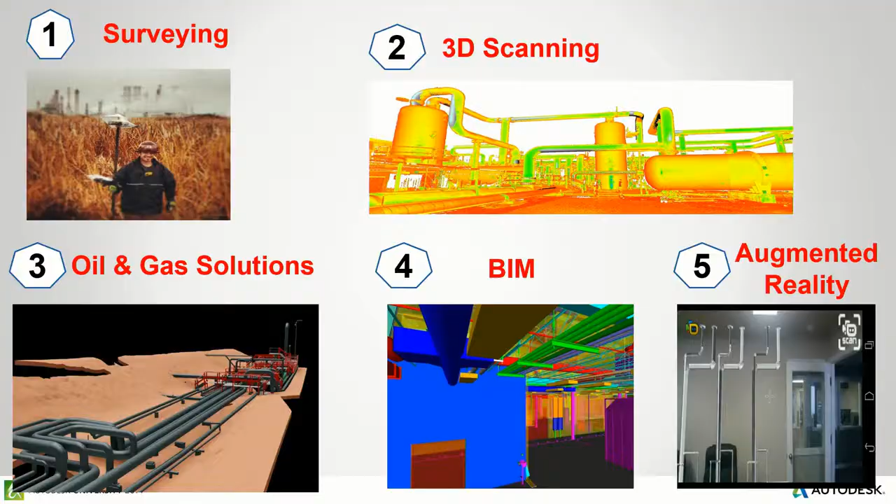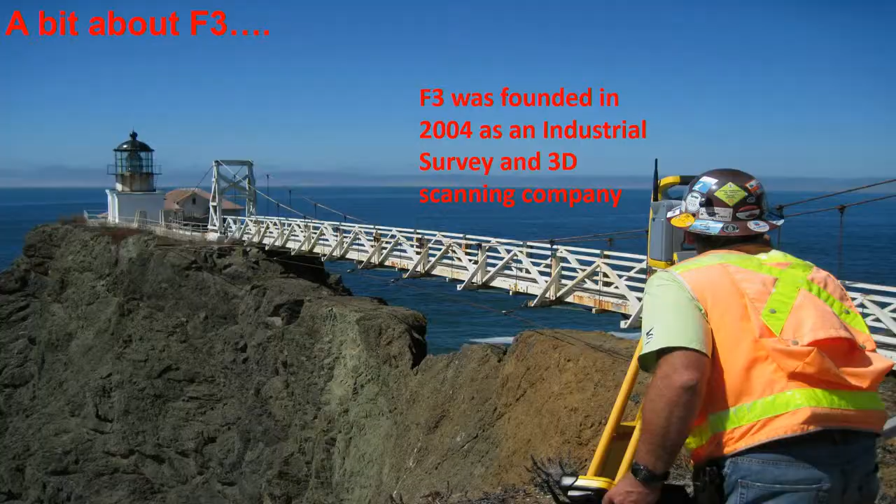So first, a little bit about F3. We were founded in 2004 as an industrial surveying and 3D scanning company. Today, we're a global provider of land surveying, 3D scanning, 3D printing, metrology, BIM and CAD services, and we're fortunate enough to work with a lot of great companies.

I got my mom calling. I think I'll have her wait. You guys want me to answer it? No. What, Mom?

So, 3D scanning in oil and gas. The origins, roughly, I'm going to go over that. The struggles, at least ours, with acceptance and accuracy, adaptation, successes, and then kind of the same thing with BIM. It's crazy how they parallel each other a little bit, at least from our perspective. Then we'll have some time for questions.

So it's my theory that the BIM industry, at least in Northern California, is on the same pace as the petrochemical industry was about 15 or 20 years ago. And what I mean by that is the petrochemical industry was slow to catch on. Started off using 3D scanning, reality capture, and offshore oil rigs. It's kind of where the techniques were perfected. And then went to refineries, tankers, terminals, and pipelines.

The BIM industry was slow to accept point cloud technology as well. I think a lot of it was that architects didn't know it existed years ago, and then when they did know it existed, the price point was still high because most of the service providers that were really good at 3D scanning were working in the petrochemical industry, and you have high labor rates and safety and all these things, so the price years ago for point cloud data collection was extremely high.

Contractors started catching on to it, started using it. In our experience, maybe 4 or 5 years ago, it started becoming something we'd see on bid documents, laser scanning. When Revit 2012 came out, it kind of changed things a bit, because then point cloud technology was able to go right into the Revit platform, somewhere between 2012 and 2013. And that started changing things.

And then we started seeing more architects requesting point cloud collection for tenant improvement projects. And then we started seeing AutoCAD deliverables. I'll talk more about that. I'll talk a lot about that, actually.

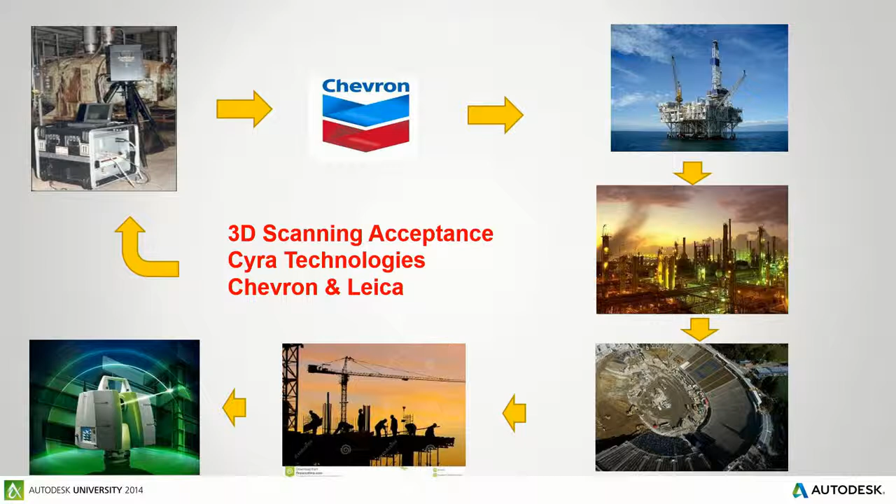So that technology then grew into refineries and then construction sites. Leica ended up acquiring the patent for the Cyrax scanner, and if you see these P20s and C10s, that's basically the latest generation of that same technology that Jerry developed in Berkeley. Anyway, that's a little brief history as far as I know on how scanning came to be.

As a service provider, we really struggled with even getting local refineries and industrial places to accept this technology, because we were trying to hand them a point cloud. This was years ago for us. It wasn't until we decided that when you actually do something with the data, this business will actually grow. We were forcing point clouds into our clients' hands, and they couldn't accept it because they didn't have the software, they didn't have the computer space.

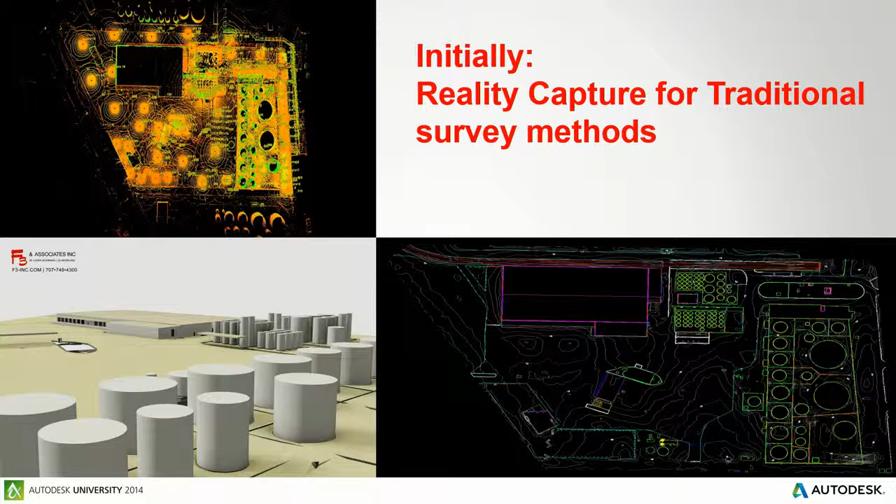It was frustrating. So we started going back to our roots as land surveyors and producing maps from the point cloud data. At the time, we would do a map like you see here, and we would just put this in a little block on the title page just to say, 'By the way, it's a 3D CAD model too.' But even then, people weren't using a lot of 3D CAD. This actually started selling the service by doing something with the point cloud data, instead of trying to force point cloud data into our clients' hands.

So, early successes. We had to kind of build on proof of concept. It was a big education process, both in the petrochemical industry and in the BIM and construction industry. It's the same thing that we're going through now that we went through years ago.

One of the examples that we used to take on the road with us is this one. This is a dry duct tower replacement, replaced in kind. The challenge is the unit doesn't want to be shut down. Scaffolding is expensive and dangerous. There were no record drawings, and the manufacturer needs direction.

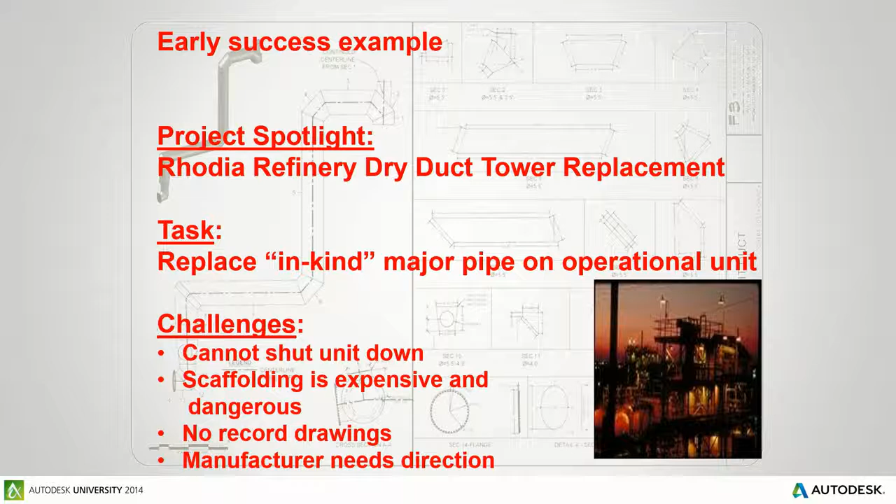So that's basically the job right there. We had to replace this pipe. And the client still had no clue how we were going to achieve this as-built. And they didn't care because at the end of the day, we just extracted what we needed and we gave them this set of drawings. Again, the point cloud never really went to the client, it stayed in our office. But we were making these drawings, and essentially that's the end product. The client never saw the cloud.

This is the same in BIM when it first started as well, and I'll talk about that. For us, the perfect service is that when this pipe's manufactured, we'd like to go to the manufacturer's facility and also scan the one they built. And if we can do that, then we kind of close the loop on where the error can be, and the thing usually slips right into place. This particular pipe was built in Italy, and the client would not fly me to Italy to scan that pipe, no matter how much I asked and begged and pleaded.

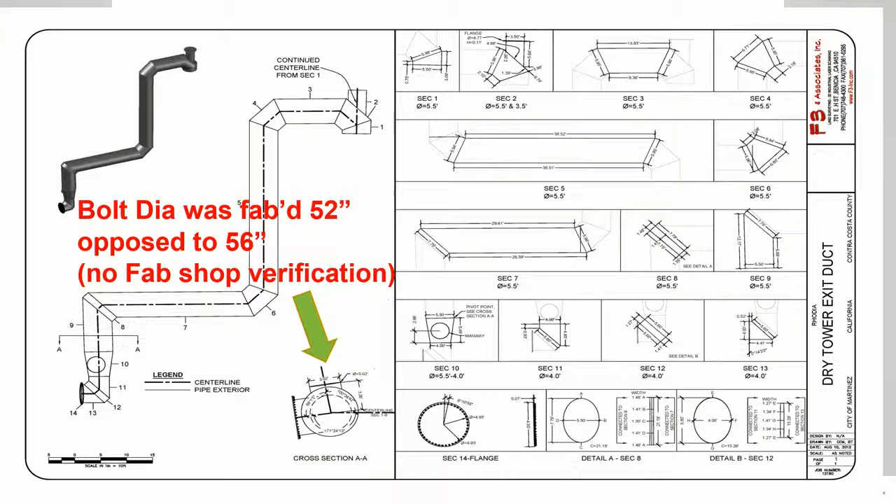But when it got on site, we discovered that it was actually built to a 52-inch as opposed to a 56-inch diameter. We were able to make that change in the laydown yard before they flew the pipe up. So, as jobs like that got behind us, we started discovering that clients were getting more and more confident with the process, and they were trusting in the data, and they were trusting in the accuracy. So as this confidence increased with our petrochemical clients, we started seeing the submittals start changing.

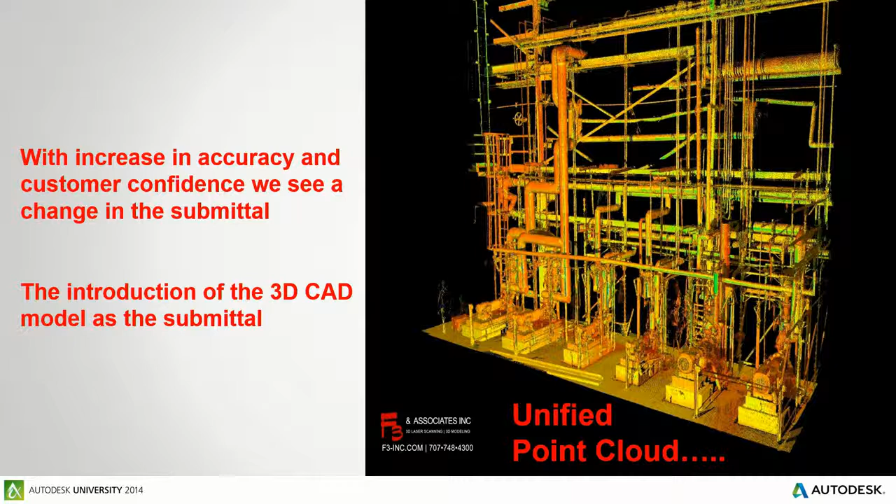And now what we're starting to see at this time, this is a couple years ago, is the introduction of a 3D CAD model as the submittal. So where we were just giving them plans in the past, now we're starting to give them 3D CAD models. So something like this turns into something like this, and that's the end result. Maintain the accuracy of the point cloud, which is about 1/8 of an inch. And this is a working, living, breathing model. We use the combination of AutoCAD Civil 3D and AutoCAD Plant when we do these models. Valves actually turn. It can be the basis for asset management, depending on how savvy the client is.

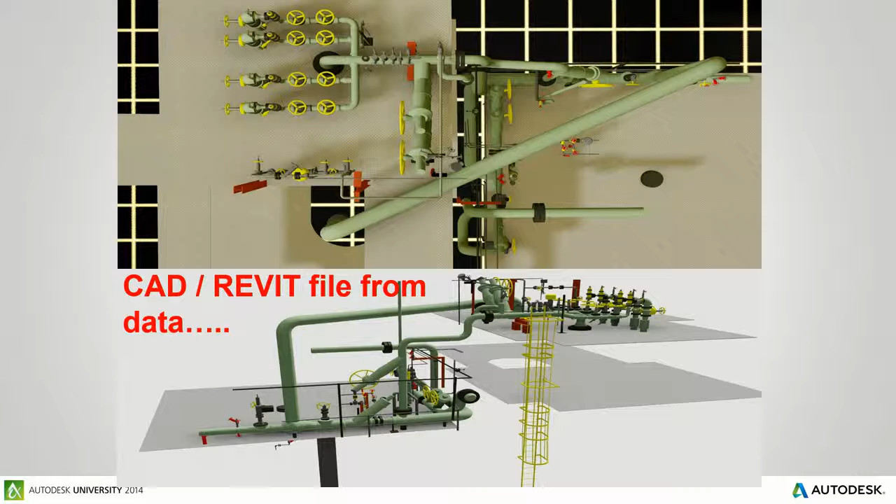Another example is this pipeway here. I like to use this slide too because it illustrates, I don't know how familiar everyone is with scanning, but scans come together from multiple setups, and that's how you create one true 3D scan world. If I was to turn a scanner on in the middle of this room, I'd capture the side of your heads and the front of the chairs, but I wouldn't capture the back. So we move the scanners around and we stitch them together with targeting. If you practice surveying like my company does, then you can stitch them together with coordinate geometry as well.

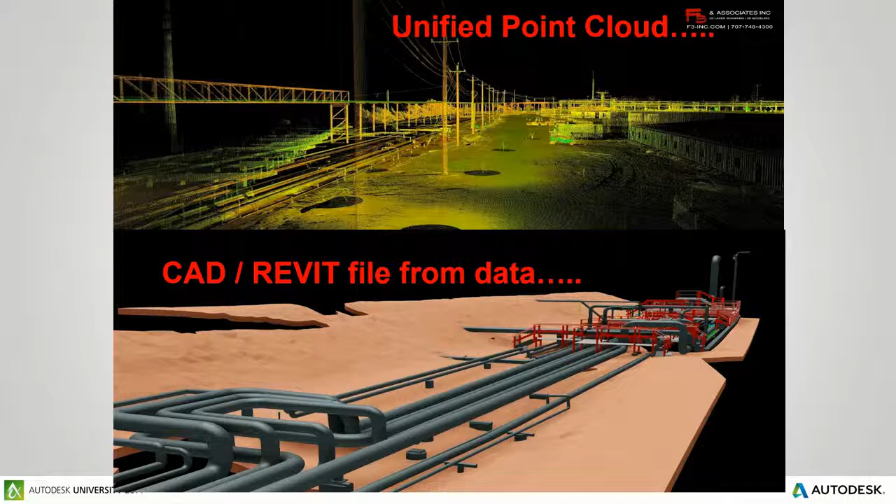And typically, if you are very careful with this technology, your bundle adjustment, no matter how many scans you throw in the mix, can be 1/8 of an inch or better. And so multiple setups are used to achieve one final cloud, which achieves one final pipeway. Another example of that. We don't submit a lot of Revit data in the petrochemical industry. Most of it's 3D CAD. Some more examples.

So, probably the biggest reality capture milestone for us, and this is the one I like to talk about quite a bit, is this project. This is a major turnaround of a coker unit. All internal components need to be replaced. The owner wanted to remove the top of the coker. The coker is 400 feet tall. And the owner, being the refinery, wanted to cut the thing in half, set it on the ground, and then that's how they're going to remove the internals.

Well, the contractor thought it would be good if they could just cut 2 door sheets in this thing instead. Cut one on the bottom and one at the top, and they could remove the internals, and it would speed up the process. It would be safer. It would be more cost effective. But the owner didn't believe it was even plausible to do the project this way.

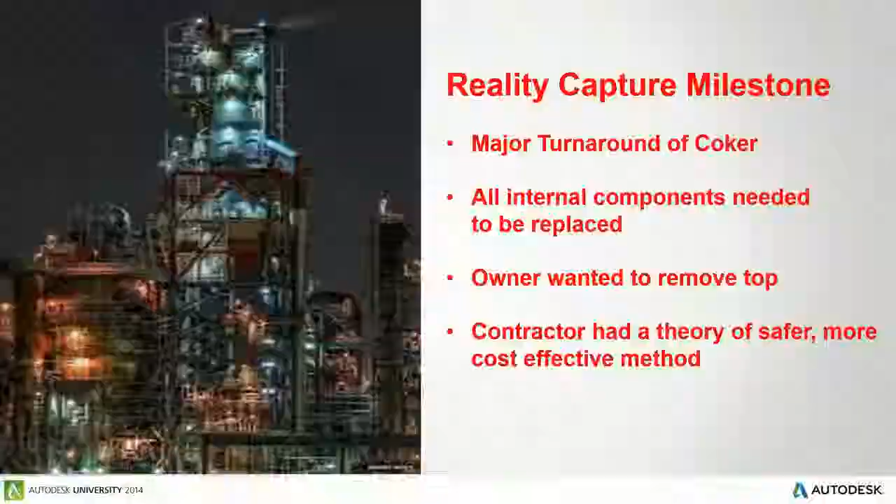So we scanned it, as you see up top, and we produced this 3D CAD model of the outside and the inside. We got to the inside through a couple of manways, and then we filled in the gaps with what we couldn't see with the archive plans in a 3D CAD environment.

And the result was, it's going to be a long day with this clicker.

There it is. So the result was this coker here, again, 400 feet tall. All the internals are on the inside where they're supposed to be. All the different colors signify where the contractor wanted to slice this thing up to remove it out of the door sheet. And the reason we produced this was to make this removal video right here.

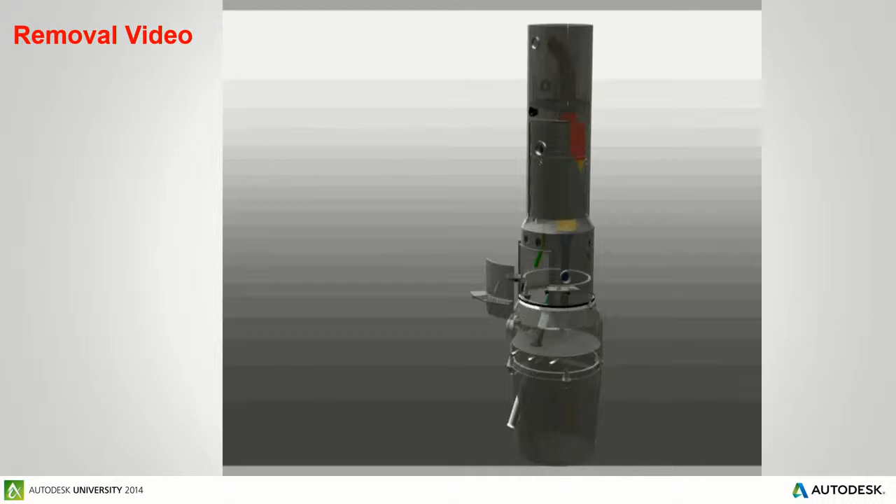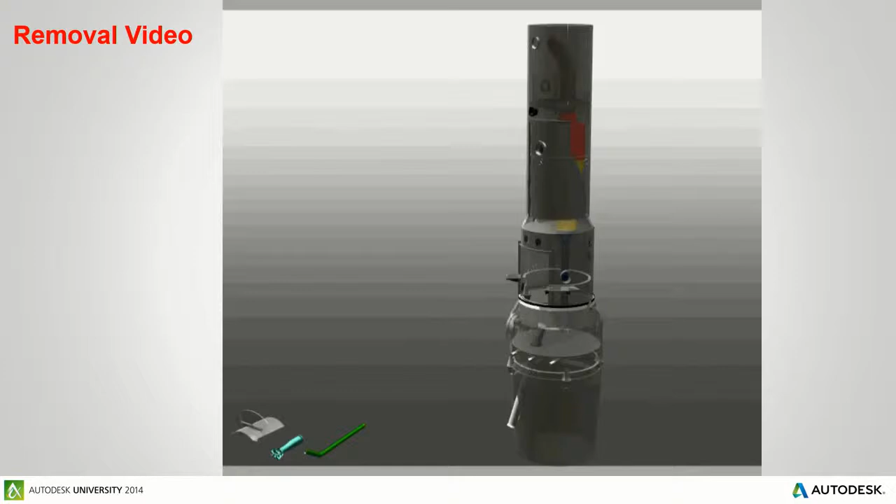And this removal video is what gave the owner the confidence to let the contractor proceed with the project in this direction. But it was the same thing. It was having them trust in the data, having them trust in the workflow, having them trust in the contractor's plan. Everything was to scale, and when we produced this video, it gave a visual concept of what the contractor was trying to achieve, and it gave them the green light. And because it's all based off of scan data, if it works here, it's going to work in real life.

We see a lot of similarities to this when it comes to, you know, when I think of BIM, I don't just think of buildings. I think of also your contractors, such as your Kiewits and stuff that are building great infrastructure and utilizing models just like this to do proof of concepts, to actively perform the job before you perform the job. The project didn't go as fast as this video.

This is riveting television here.

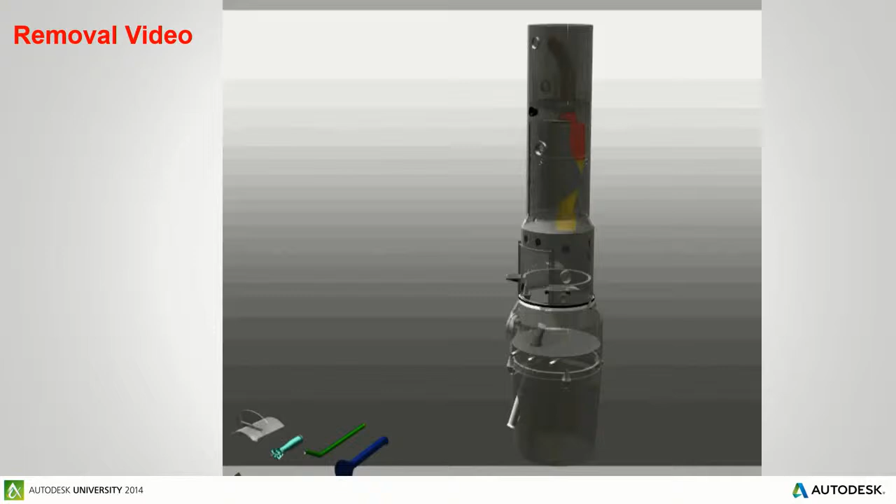So that's all the refractory. And the big challenge was this yellow thing there.

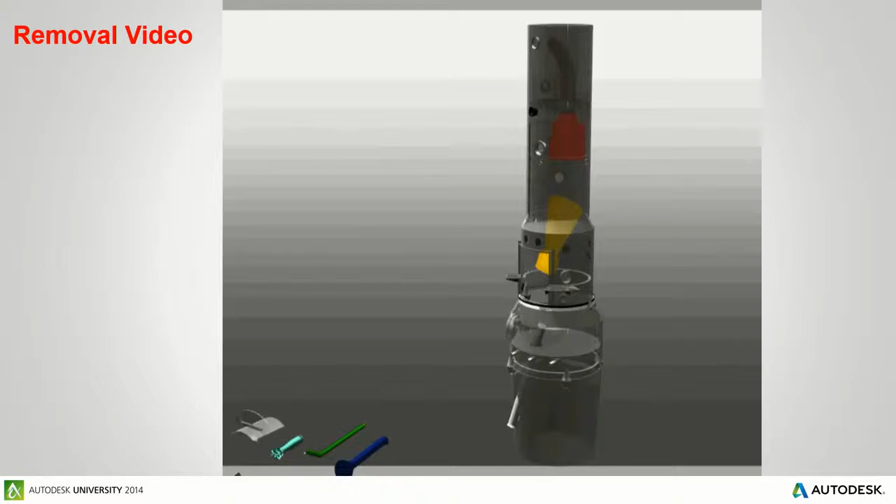That was the deal breaker for them, and I actually had music playing, the Space Odyssey, when I had this video originally, and it worked well. Wow.

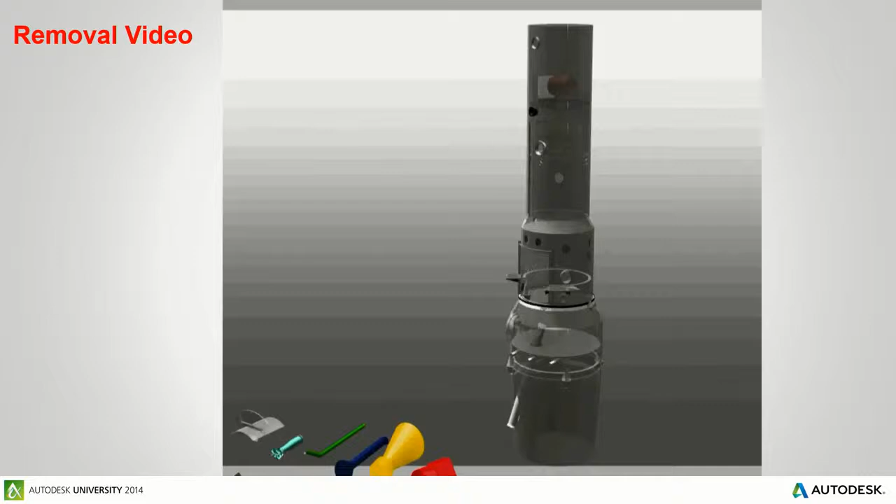And there's the top door sheet. So while this video was instrumental in getting them the green light to proceed with the project in this way, it still was not all that we needed for a communication tool. So we produced this 3D print. Now I'll be talking more about this at 3 o'clock. This is the only example I'm using here.

But my company has several patents when it comes to scanning and augmented reality and scanning and 3D printing. And this 3D print, we printed out 5 of these things. In the back of it, it opens up like a dollhouse, and we've hidden magnets inside the print so that everything disconnects the same way the contractor wanted it to. We printed out little guys so they could stage construction, little hard hats, so they would be safe.

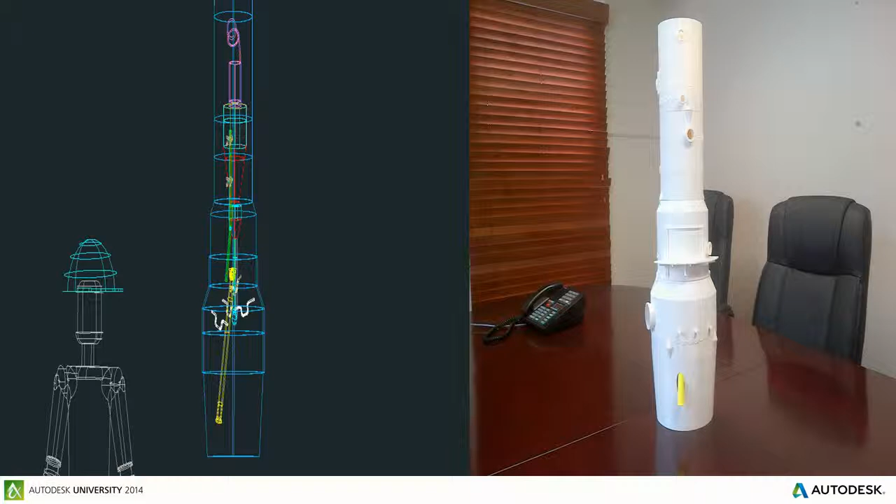And we printed out 5 of these things, and it became the communication tool. The ironworkers got them, the pipe fitters, the engineering team, the owner, everybody had one of these prints, and they always talked about the project before they started the day, and it was a very valuable tool.

This is another example that I like to talk about. This was an extreme value to the client. We also made a 3D print for this one as well. I don't have an example of it here, but this is a separator, and it's taking new design, right, with an existing facility, same as BIM. So we scan the one that is in the refinery. We take the plans from the engineer, and we make one model.

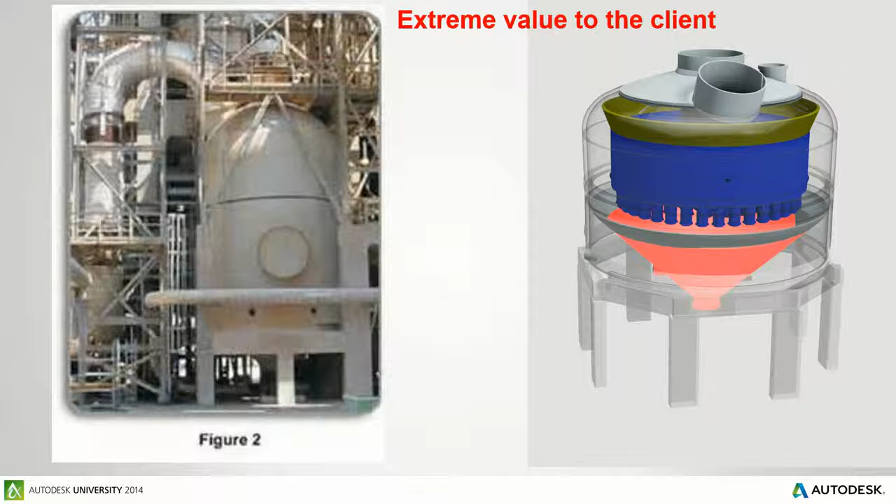And we discovered some things on this thing that picked up 2 days on the schedule for the client. For this separator to be shut down was $500,000 a day. So we picked up 2 days on the schedule with, you know, very minimal cost to the client. So at this point, the refineries are getting sold on this technology.

And the last industrial example I like to talk about is this one here. This is an aqueduct thing, and this project is a lot like your typical BIM environment. We scanned this shaft. We put the scanner, we zigzagged all the way down. We use metrology equipment at the bottom to increase the accuracy of it. Metrology is usually used in aerospace.

And we took the engineer's design for all the internals of this thing, and we slid it into place with a 3D CAD model, and we discovered it didn't fit. So we sent them the model with all the internals, and they modified the design, and when the thing went to construction, it slipped right in. So it's having this forward planning.

So we went from really selling the clients on these concepts, that it was even valuable to them, to now they can't live without it, and that's through successes. And I think the BIM industry is on the same path.

So, come on, there we go.

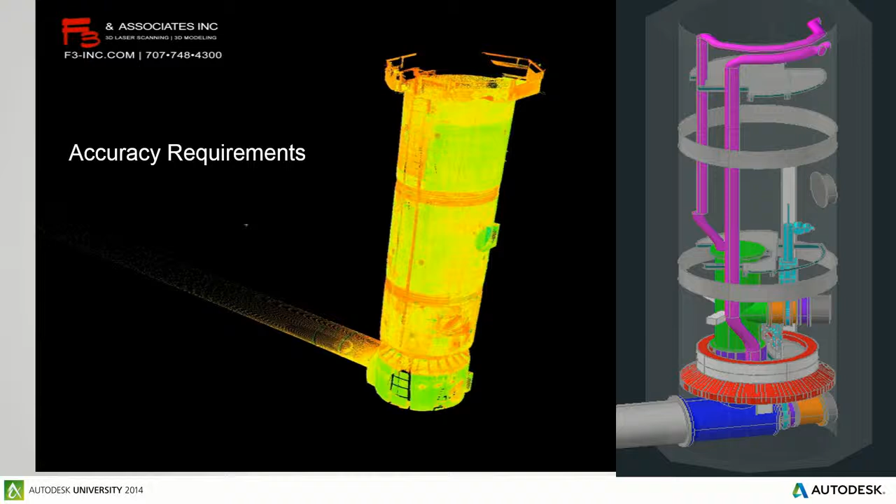So what has this taught us about BIM? There's similar traits between the petrochemical industry and the BIM industry. They're both slow to accept, they're slow to trust the accuracy of the data, and the submittals are changing. It's evolving very fast. And what I mean by that is, like I talked about at the beginning, with the petrochemical industry, we had trouble giving them what they needed with the data.

And then everything evolved. Now we're handing over point clouds to your Jacobs and your Parsons and people like this. The point cloud has now become the finish line because the industry's accepted the technology and it's become a standard. Now you're seeing specifications on how you collect the data and how it's presented. And that took a few years.

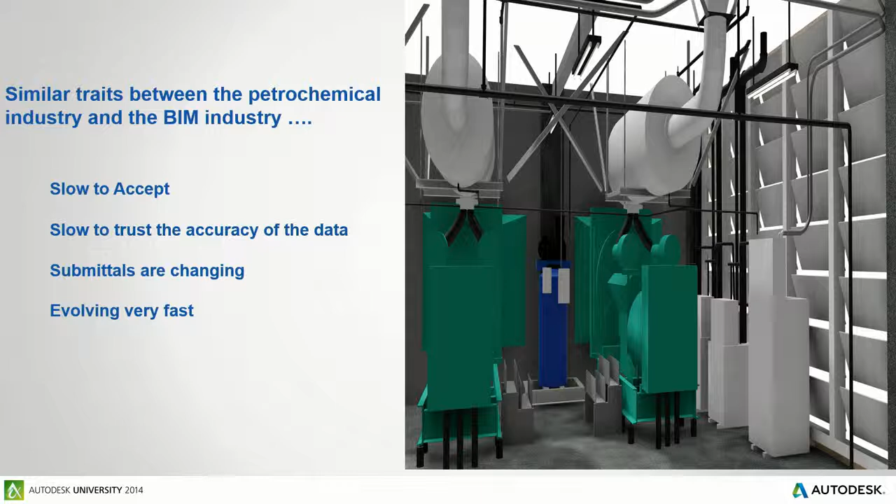With the BIM industry and the architects and the contractors, it's the same story. The submittal's changing, acceptance is becoming more and more, and it's a little bit of confidence as well. Is the point cloud really doing what we say it's doing, and is it as accurate as we say it is?

So, an example I like to talk about when we're starting to lead into the BIM part now is this project here. Studies have proven that Cal is the best football team in the world. I don't know if you guys knew that or not.

So, project challenges on this one is the Hayward Fault. The stadium is right on the Hayward Fault. That's one of the reasons that we have trouble scoring touchdowns. Concrete poured by hand in the 1920s, and the 50-yard line was not the center of the stadium. These are all things that we discovered through the scanning process.

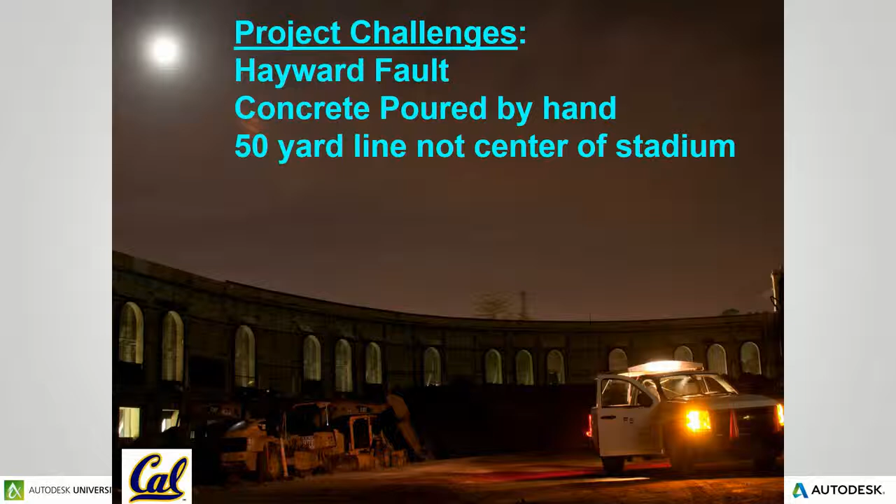So how this project would go is, you see right now you're on the internal of the stadium in this picture. We would chase the demolition process, and we would scan, and we would produce drawings to the construction team, Webcor, and HNTB, the architect, and they would modify their design in real time. This is a shot of the point cloud. Every day we would scan, and through redundancy, we populated this total environment.

This is Tightwad Hill. Watched a lot of football games from that hill because I couldn't afford to get in. Again, best football team in the world.

So this is what we were producing at that time. Webcor had not worked with point cloud at this point. They had never done a job with a point cloud. Today they own 4 scanners. And this is the first job that they used point cloud with their BIM environment on. But since it was an introduction for them, we had to go back to paper.

Just like the petrochemical industry, we would scan, we'd have all this beautiful 3D CAD data that no one wanted, and we produced these PDFs every single morning for the construction team for every phase of the demolition. And we discovered quite a bit. We discovered that the columns were not vertical. They were poured by hand, so where the plans call for them to all be on top of each other, they actually staggered quite a bit. They leaned in and out, which they were expecting, but not as much as they actually do.

And then at some point, the 50-yard line was decided to be the center of the actual stadium structure itself, when actually the football field was shifted within the stadium about a foot. So none of the doors and none of the windows were going to line up when it came time, because the original survey, performed by others, was off. And we found that correction, and we made that correction, and these things are what enabled this project to actually be completed on time. We ended up scanning the stairs as well.

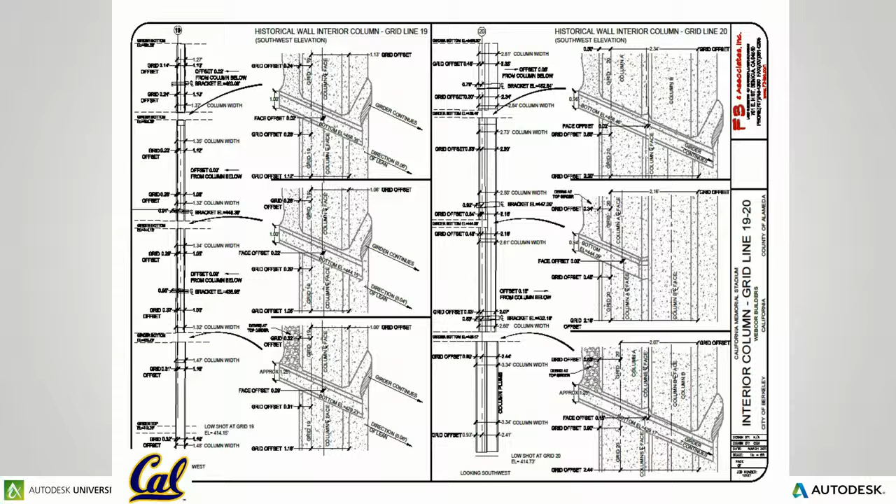We got the project done on time, and they went on to an undefeated season.

Won the Rose Bowl. And, no, all right. So we should have made the end zones wider, because our quarterback can't find it. You know, no matter which quarterback we have, the other team finds the end zone fine, but. All right, that's enough about that.

Floor flatness as well. Now this is something that we did in the press box, but this is something we do quite a bit for contractors in the BIM environments. We'll scan the floor, and we'll produce a color-coded flatness map once the concrete's poured. This is starting to become very commonplace. I think that there's going to be some changes in the way that concrete floors are certified, at least now that the contractors have accepted scanning technology for their BIM environments.

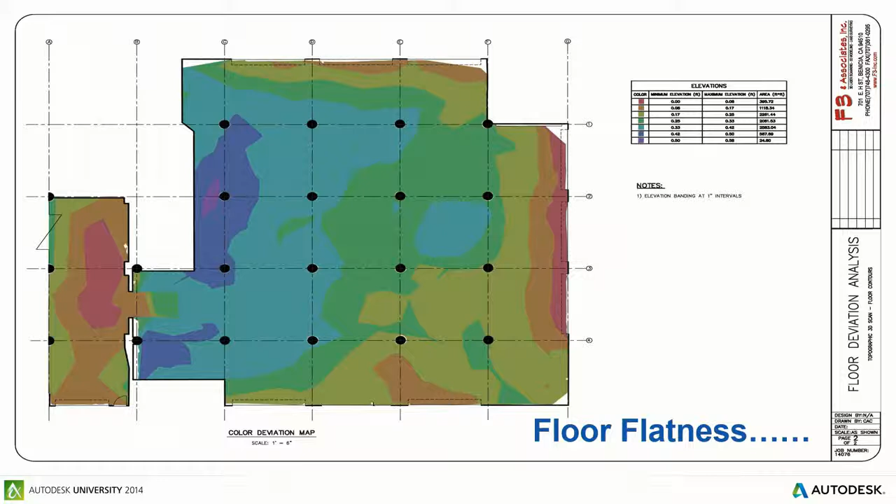The way that they do floor flatness inspections now is pretty primitive, and I think in probably the next year you're going to see floor flatness certifications being done with laser scanners. And what's great about that is you get a lot of bonus data, right? So you're scanning the floors for concrete flatness, but you're also picking up the overhangs and all the pop-throughs and everything else, and it becomes this great use of data.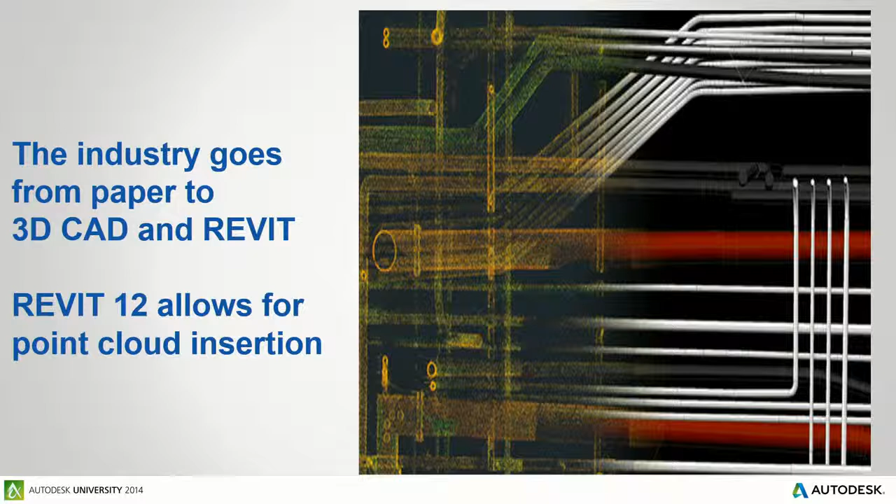So the industry goes from paper to 3D CAD and Revit. Revit 12 allows for point cloud insertion. This is the same pattern that we saw with the oil and gas industry. As the industry accepts the technology, the submittal changes, and the industry itself grows. So you go from just point cloud data to a 3D CAD model. And that's kind of where we are today: our submittals now are one of two things, a point cloud to the Revit users that insert it, or a 3D CAD model.

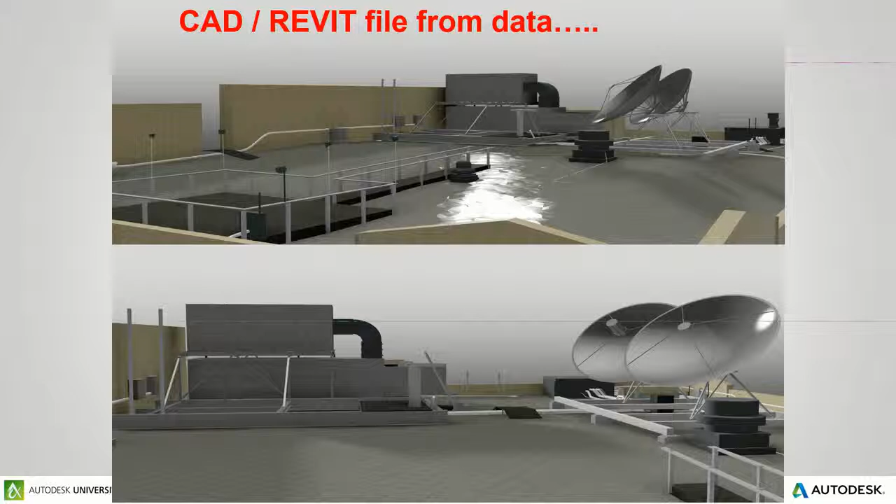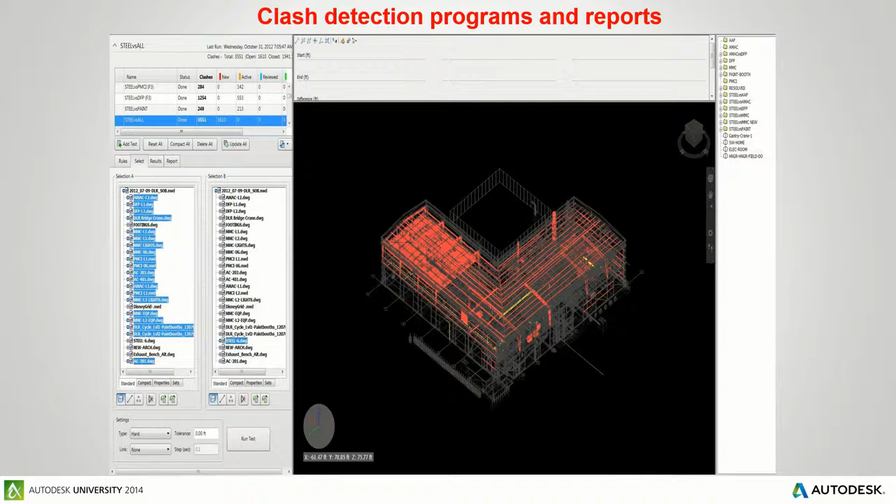So, and obviously clash detection. All the BIM professionals in here know about clash detection. And that's something that actually in Navisworks is a big use for the BIM data, taking your existing facility and putting your new design in there and seeing what hits and what misses. And that's something that the petrochemical industry is now utilizing, so it's kind of come full circle. Now the petrochemical industry is having us scan stuff and then putting their new design in to do their own clash detection programs. This is at the Walt Disney fireworks thing. I think there's like 7,000 clashes in this thing. I can't remember.

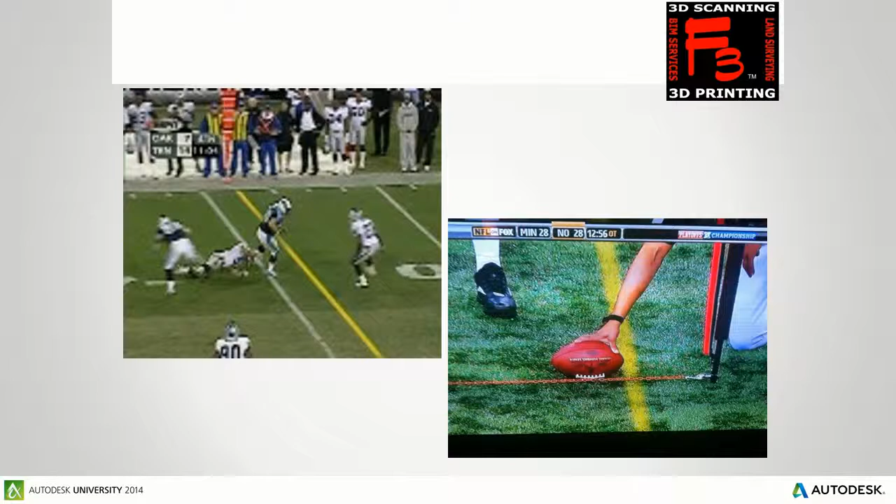So, what I want to talk about now to finish up, and again, as I promised, it's not going to be that long, is augmented reality. A lot of talk about augmented reality these days. There's a lot of people investing in it. We've been practicing augmented reality with some of our submittals for about 2 years now. Where are we here? So, in the past, augmented reality was kind of whimsical. You watch football, the first down marker is not really there, right? It's augmented reality.

I like to use this slide because it clearly shows the Oakland Raiders getting smoked by Tennessee. It's like 7-54. How do you score 54 points? And didn't they just lose 52-0 recently too? I just want to look at that for a while. I'm a Niner fan. So, they're not doing much better.

Augmented reality. So we've got a few sets of Google Glass. We talked about this at Hexagon this year, and we're launching these BIM environments that you can visualize when you walk into the construction site. So there's a couple different ways that can happen. It can happen through the gyroscope, accelerometer, and through the GPS on the device. The Google Glass actually has all these things. Same thing as your tablet and your phone.

So essentially you could walk in this room and orient yourself to the walls, and plus or minus a foot or so you would see either what's behind the walls or the new construction. Well, we've kind of developed some stuff and taken this a little further.

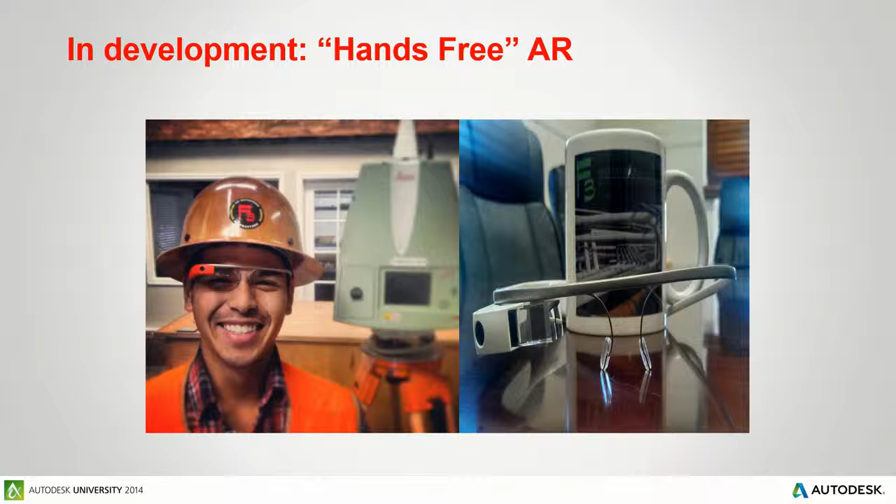And utilizing survey technology, practicing land surveying, we can scan an environment when the construction is taking place, like a hospital, for example. It may not be important to know what's behind these walls, but in a hospital, that's where all your important assets are. So as the hospital is being built and the walls are not skinned up and the pipes are exposed, we can scan that based off of a land survey.

Then they can cover up the walls, and we can go back and we can set QR codes. QR codes are what they're scanning when we walk in, but they can be anything. It can be an Ansel Adams photo. It can be a "this is what you should eat in a hospital" chart. And when the maintenance guy shines his tablet or his Google Glass at that, it disappears and you're looking at what's behind the wall within about 1/8 of an inch.

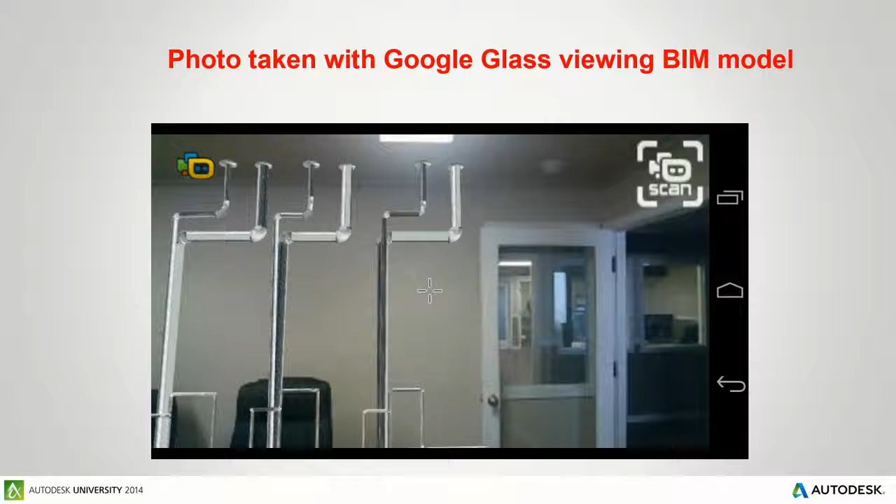And that's the difference when you practice surveying with this technology. The QR codes are actually surveyed in. So this picture, we'd actually put a crosshair of where it goes by rotation and orientation because it has a relationship to the BIM model behind it.

These are snapshots we took with the Google Glass. Google Glass I'm not a fan of. It lasts 10 minutes, 15 minutes on the battery, gets hot. They can do much better.

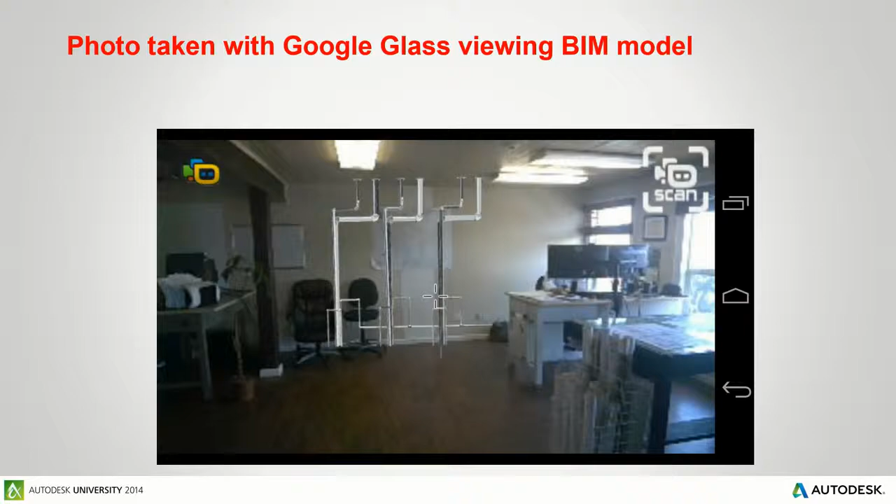So one of the big applications that we've been doing over the years with augmented reality is up in Northern California. We have PG&E as our provider, and the petrochemical industry as well. A lot of their important assets are underground. So we have a pothole once plan, because potholing is dangerous and expensive. So if their pothole operation is going on, we get mobilized to the site and we set up a survey baseline and we scan it once the pothole operation is complete.

And then they cover back up. And then we can set a permanent brass disc like a survey monument in the correct location, and that becomes the QR code forever. And that disc has a relationship to the assets that are underground. So at any point now, the client can go with their iPad or tablet and see what's underground. Same thing again as behind the wall. And that's another way that the petrochemical industry with all this technology and the BIM industry, I think, are on the same path.

I think in the future with these wearables, not Google Glass, but maybe something better. As surveyors, we do a lot of construction layout. We put stakes in the ground, say this curb goes here, this underground system goes here. I think in the future, the carpenters and the ironworkers will just have these wearables on, and the plans, the BIM environment will be uploaded into that technology, and they'll have a different color for whatever their trade is, and they will be able to see where whatever they're building goes for elevation and location within about 1/8 of an inch. I mean, it's not far, the technology's there.

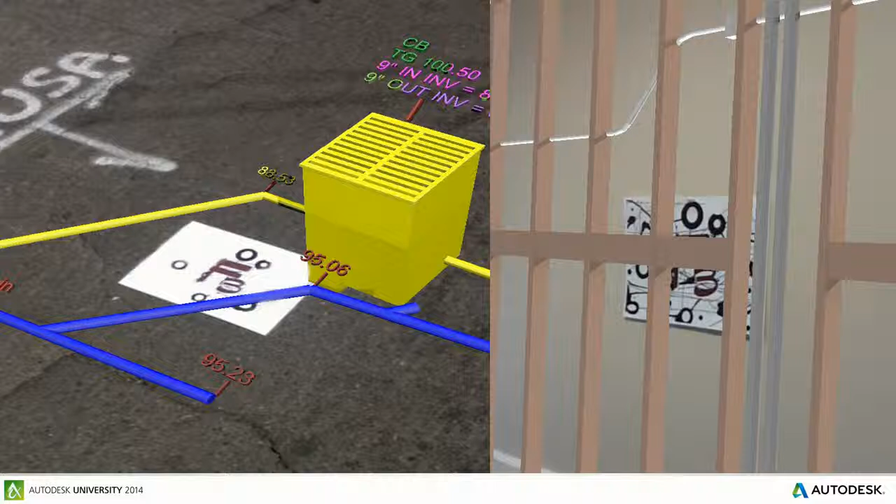We could do it now. It's just industry acceptance and confidence in what they're looking at. And I think that's what we're working on. It's definitely something that we're developing.

Also, we've seen a lot of drones now. We've done some applications in the petrochemical industry, not for what you may think, but more for air quality monitoring, perimeters. And the BIM industry and the construction industry is catching on to that as well. The guys out there, SkyCatch, have a demo that they do if you go to their booth, where you can see they have these predetermined flight paths where the drone goes up and scans for progress.

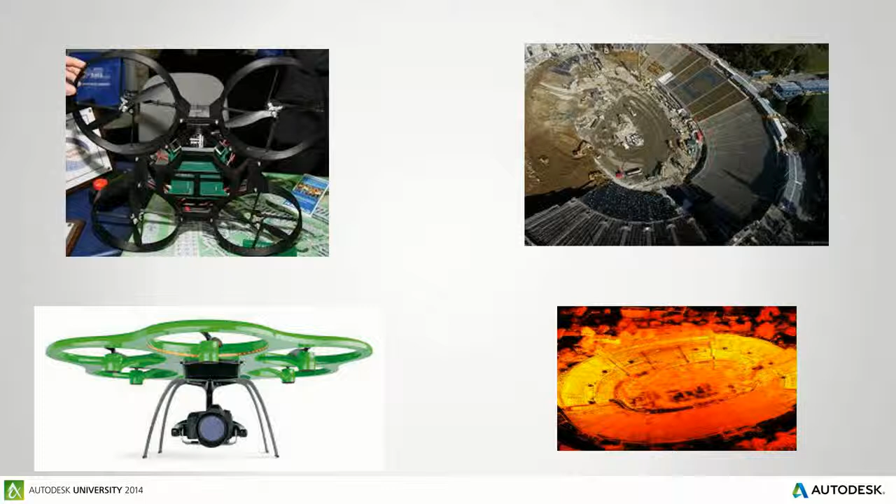I think that once the FAA lifts the regulations on these bad boys, there's going to be so much that you can do with this stuff, from surveillance to LiDAR to photo inspection to air quality monitoring. I think every construction site is going to have a drone on it.